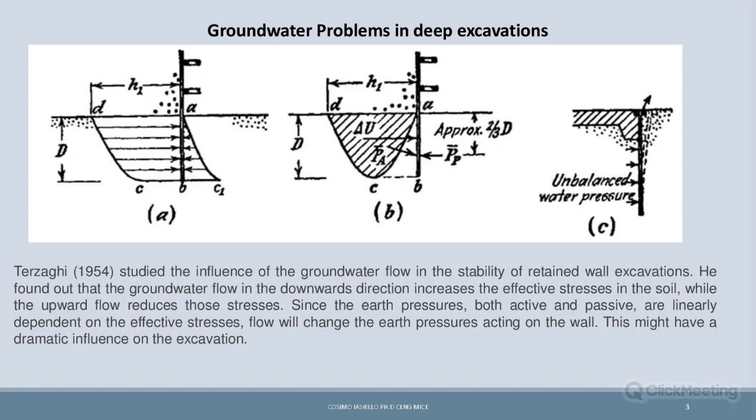Starting with some construction advice: when working with, for example, an embedded wall with anchor bars, we have to provide certain details in order not to have this problem. I can show you here.

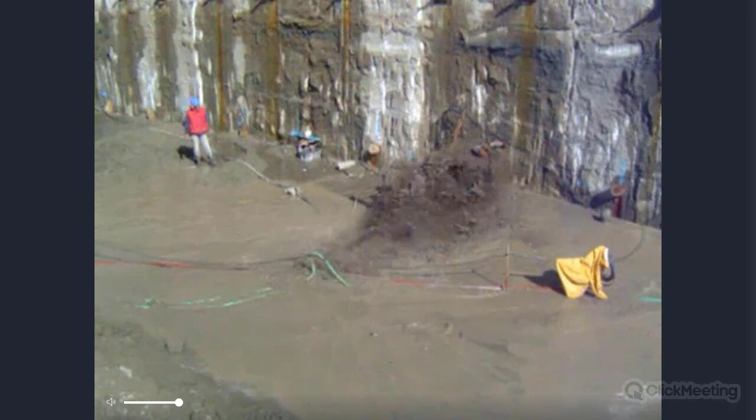This is the problem you can face when excavating in water. As you can see here, this is the water, the anchor, the original forepoling, and right now we are excavating below the water table. Here we are taking time to inject the ground, since water has the possibility of coming through this green pipe.

Once we have this green pipe, we can inject grout into the ground and stop the water from coming through. So coming back to the presentation, this is the typical anchor with the possibility of grouting, and here we have a hole, and through this hole we could stop the water coming in.

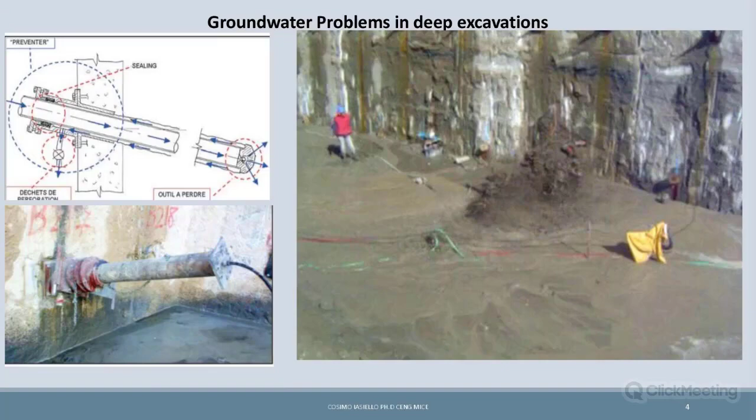Another problem in the excavation of, for example, an embedded wall is the so-called subpressure—meaning the pressure acting on the base slab. This is a case of a tank close to a river.

Based on my experience, we have three possibilities regarding subpressure: live with the subpressure, carry out permanent dewatering, or carry out some sort of soil treatment.

For example, in this case it was carried out with columns of jet grouting. We can also use the jet grouting as additional weight to calculate our uplift or heave, depending on whether we are in clay or in sand, to contrast the acting force of the water.

Also, some standards—particularly the Italian, but also the Spanish—have references regarding considering the jet grouting with some defects. So the area of the jet grouting should not be considered fully as is, but should be considered a bit less. This can also be done in our numerical analysis.

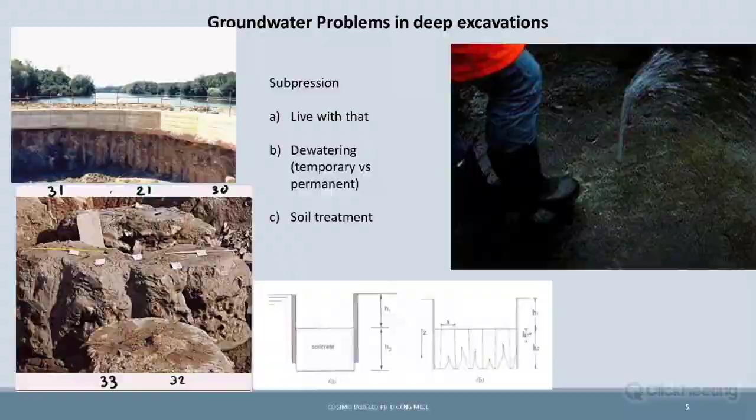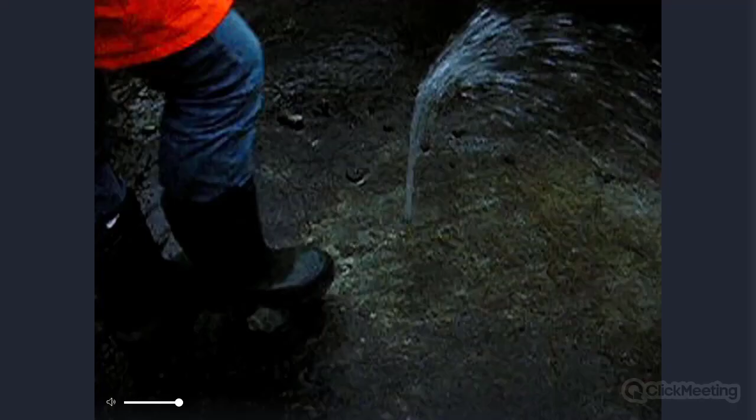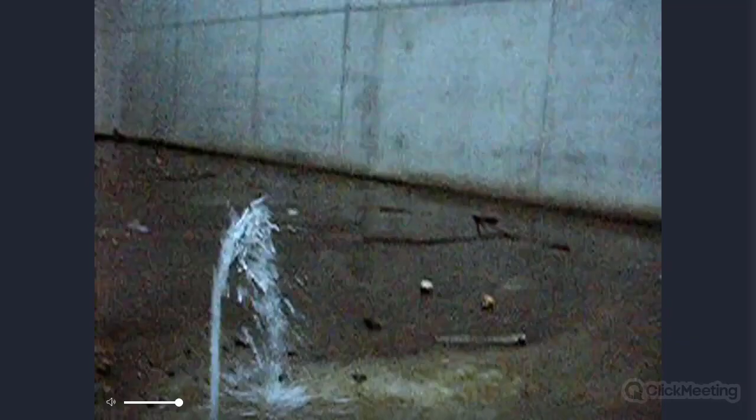This is a video regarding subpressure. Here some columns were done, here is the base slab, then the base slab was perforated to check the flow under it, and you can see how the water was released.

We could say that the deformation after or during the dewatering. This it is particularly interesting to have this number, because this would be our control with the numerical analysis.

Okay, this is a small summary. The important thing is what I told you about the earth pressure at the back of the wall, and it will rise while the pressure in front will decrease. This is important. This is a case I have studied, an analysis of a historic case of retaining structure under the groundwater table.

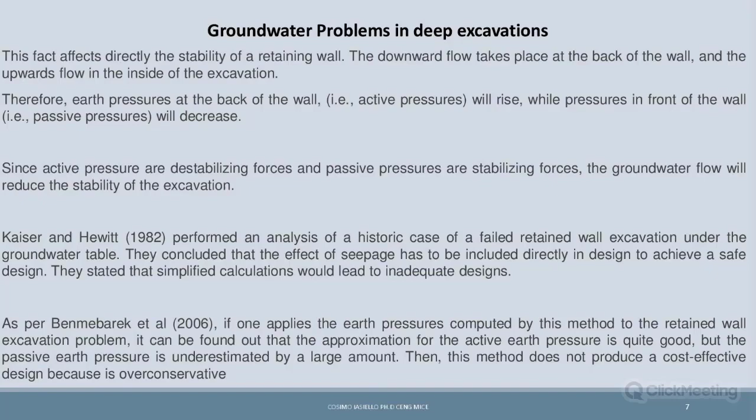This means that the effect of seepage has to be included directly in the design to achieve a safe design. And they stated that a simplified calculation would not lead to an adequate design. What does it mean? It doesn't mean that if we go back here, if we want to solve this problem only by relating it with a weight problem.

I mean the weight of this slab against some pressure of the water, it doesn't take into account the real behavior of the soil, and it can lead to a low cost effective design. In other words, our design is much over conservative. And this is also particularly attractive in those cases where the base slab or the thickness of the base slab is quite big. So this is exactly what I was telling.

Regarding the groundwater, we have three possible conditions. One is to neglect the effect of the water table. We will not consider the effect of the water table. We know that there is a water table, but we will control it, or maybe the water table is not able to create any problems for our structure.

Considering the effect of the water table only during construction, because we have some sort of dewatering, and then maybe for a temporary structure it's coupled with the dewatering. So for permanent structures, we will not use it, or we will consider permanent water table during construction and also long term. So this also can be considered in our design.

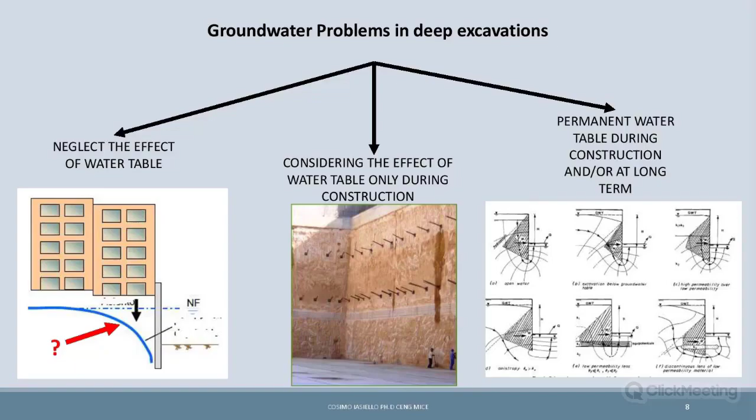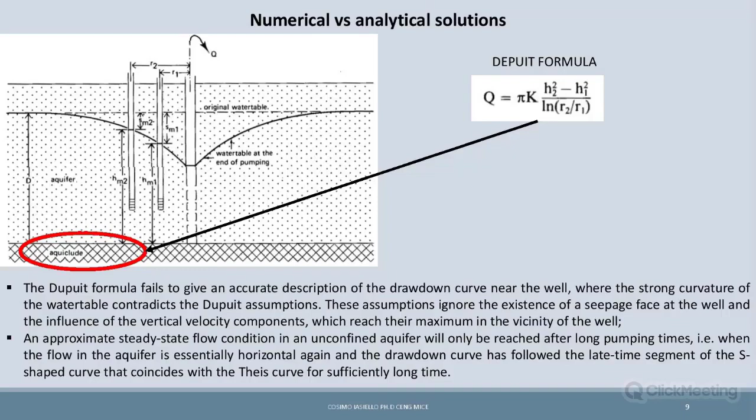So the flow is basically horizontal. We do not have any vertical flow. So if we are working, for example, to study the dewatering with a flow, with a pumping, the Dupuit formula should not be used. This curve should be used instead, because it doesn't take into account this.

Another option of analytical solution are the so-called flow nets. This particularly is what I like, because they are very graphic, and they are based on the hydraulic gradient. So the main purpose of the flow net is to estimate the flow and to check if the embedded length of our pile is enough to cut the flow net, or to avoid a value of overflow.

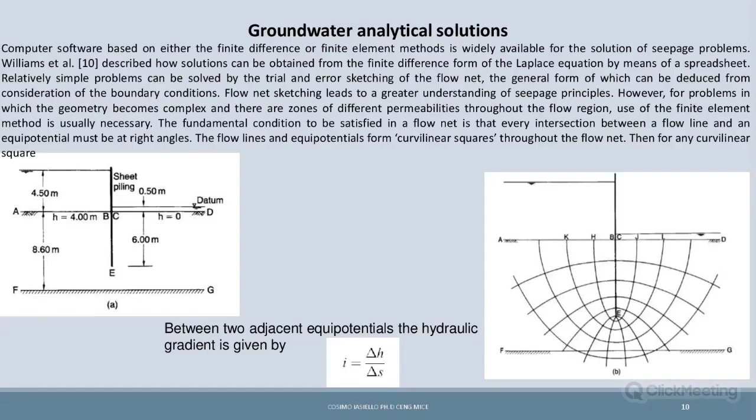And to calculate the flow net, we jump from all the equipotential lines of the curvilinear shape, to understand how many steps of hydraulic gradient I have to go through.

After that, I would say this is a high-level introduction, because at the end of the day, everyone here knows about the groundwater. Let's go with the numerical solution. Clearly, we have three possibilities of approach towards the groundwater.

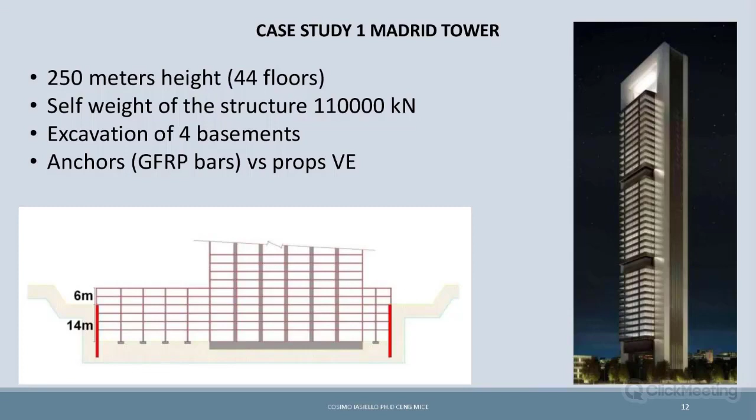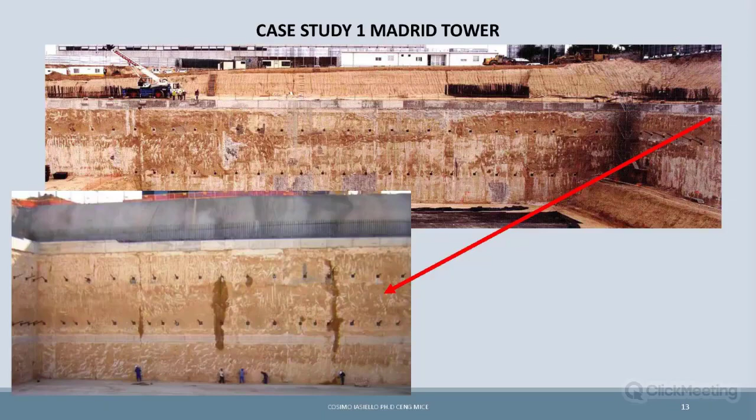So the excavation was done as previously, with temporary slopes in mid-ground. Then we have a berm to install the walls, and then the construction of the excavation. Here are some photos, and here you can see some level of water coming from some anchors - nothing important. And here is the monitoring of the stress of the anchors, because these anchors do not have the protection I showed at the beginning regarding the water table, since they considered that in this area we do not have a water table - but in this case they were monitoring the stress.

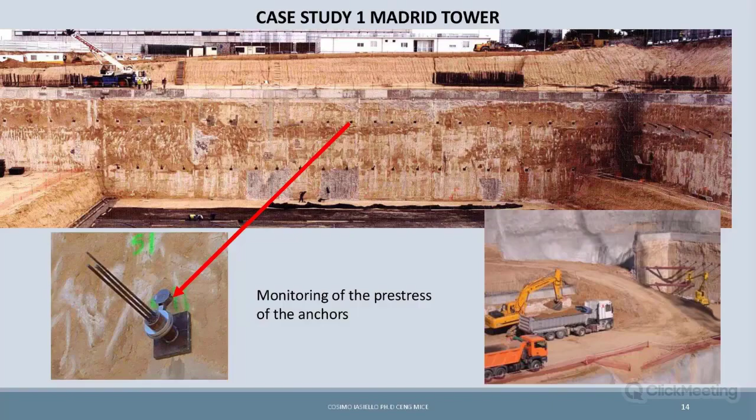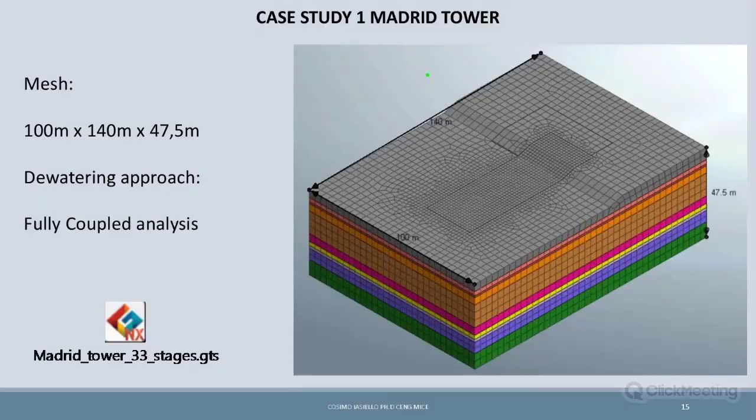What does this mean? How can we establish it in Midas? For each stage, we design an excavation, and this excavation has a nodal head. So this is doing fully coupled analysis with manual dewatering.

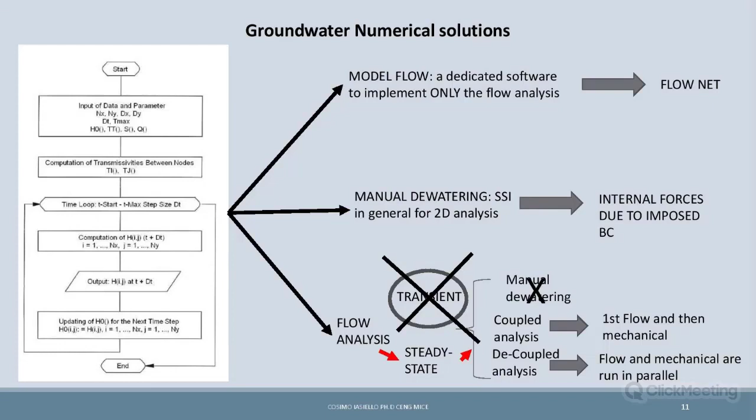This is because here the water level was not particularly important, so we decided to do a coupled analysis, but changing the manual dewatering. This also affected the duration, and as you can see, in order to speed up and facilitate possible numerical problems we could face, we set up the time. We set up the load factor with incremental values across 33 stages, just to provide the stiffness matrix bit by bit, so as not to create any problems.

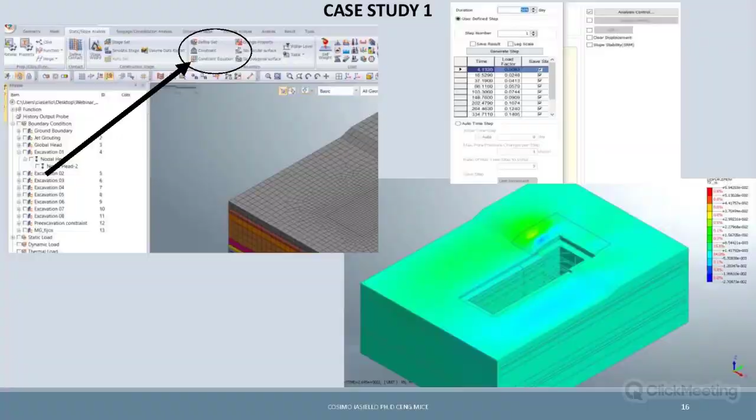And this is the solid pore pressure. As you can see here, we have a reduction of the pore pressure. Here also there were some ramps for facilitating the construction excavation. And here the equivalent flow net close to what we suppose were the drains. Okay, this was a simple way of modeling the water.

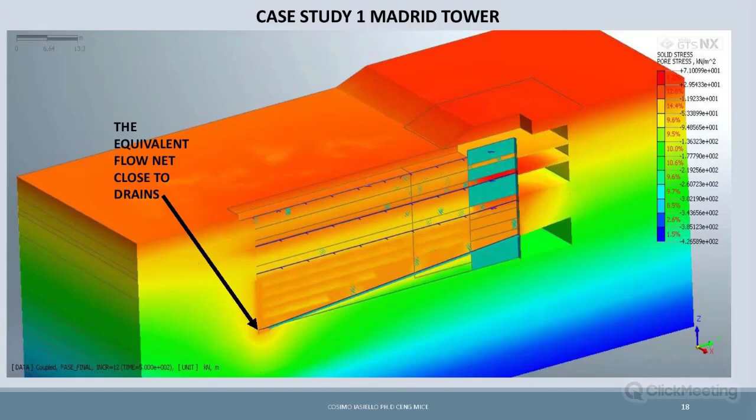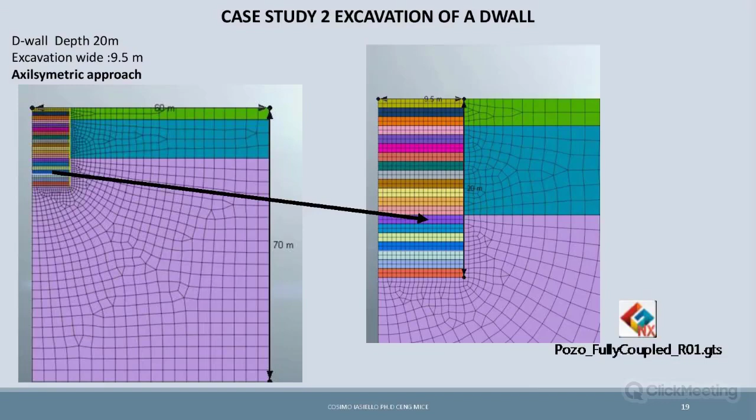Of the pore pressure. Another case is the excavation of a D-wall. This is an axisymmetric approach because it was a circular wall. It was 20 meters, and in this case we carried out two analyses.

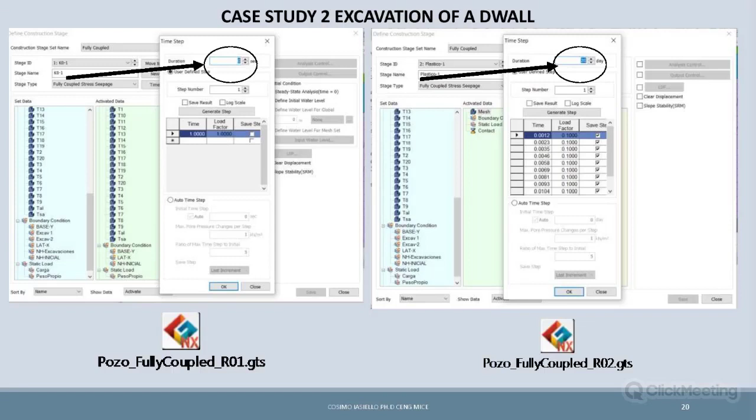One analysis, as you can see, is 0 seconds, so it's like without taking into account the time. And here is with 20 days, considering some sort of timing, just to check the differences in terms of flow.

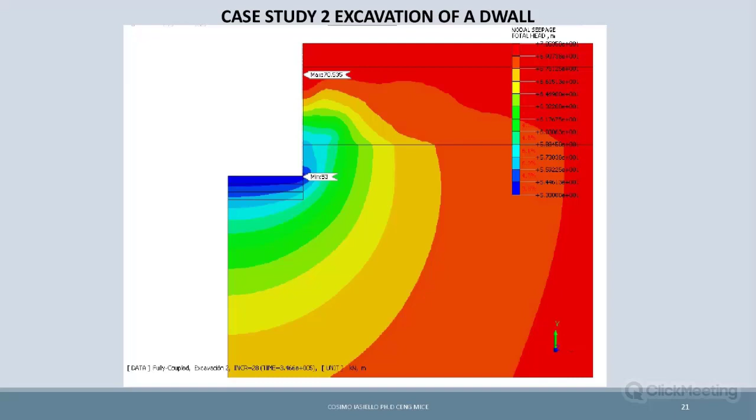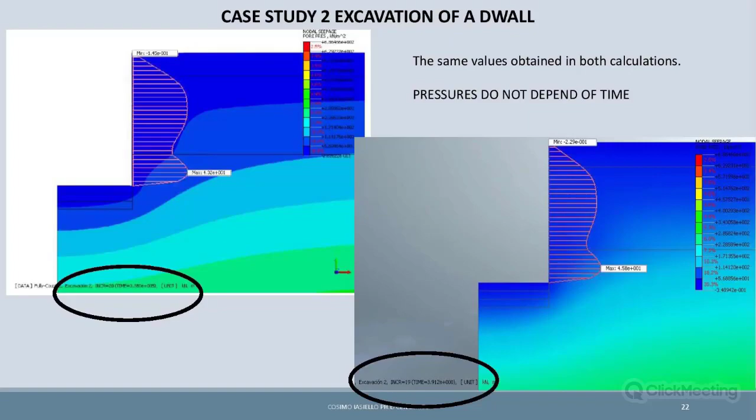The value of pressure onto the structure is the same because the pressures, and so the internal forces we are going to use to carry out our structural analysis, do not depend on the time. What is depending on the time at the end is the flow. So as you can see here in 0 we have something from minus 5, and here we have a minus 0. So we have a 5 order of magnitude difference between the two calculations.

This is helpful for us because sometimes as engineers they ask for a flow analysis, but when we have already set up the flow rate, in this case it's very easy to implement it in Midas because we can set up the day to have this flow rate, and we are sure that our pressures are not affected.

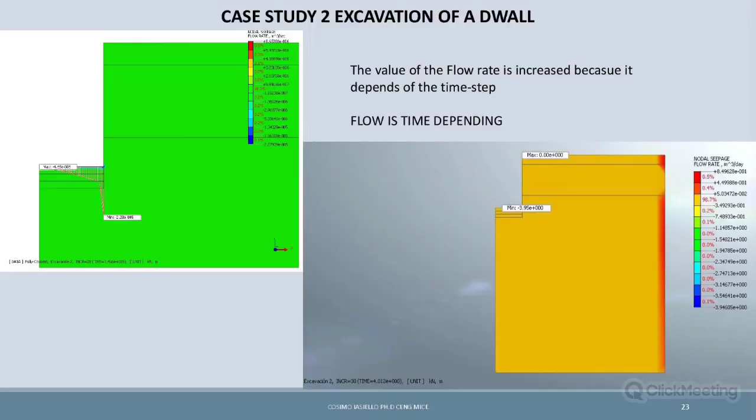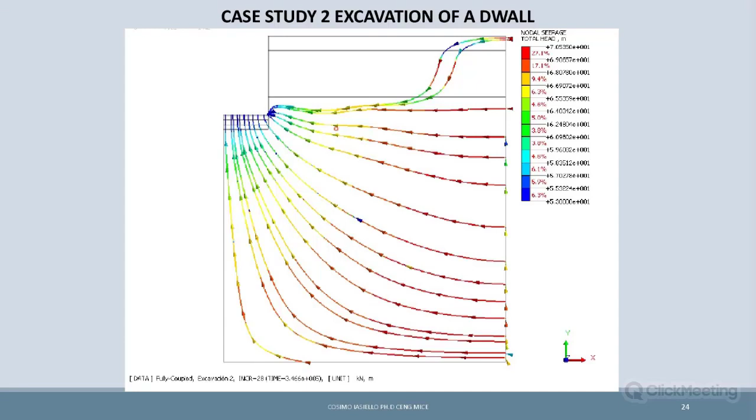This is okay, this is academic. This is the flow net at the end of the day, and how we could check it against the numerical against the analytical solution. And then we have case 3.

This is a TBM launch chamber. It's another project we are involved in, in London. Here we have a shallow water table. In London we have the level table of the Thames, a very dense urban area. Then a complicated construction process, and then the interaction between these two parameters.

So two scenarios were carried out. One scenario is the pure full, is the coupled, and the other was coupled with the dewatering. I anticipate it because it's not working, because of the difference of the potential energy we have in our excavation. We will go through this later.

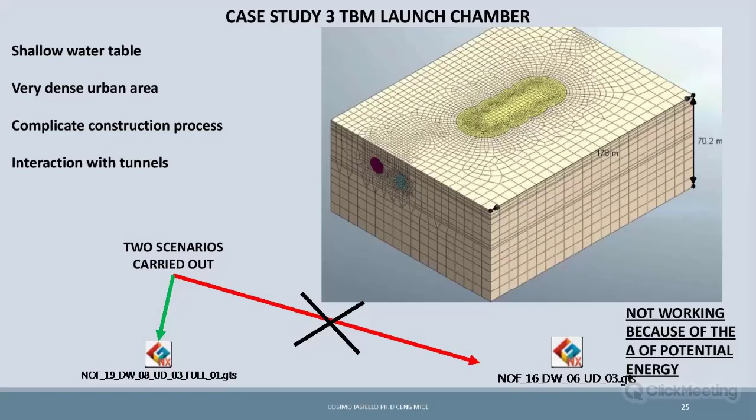Okay, so here, as you can see, the fully coupled analysis - we have all the phases in one stage set. So we are not going to define manually which type of pressure has some mesh set or some node. No, we tell Midas, this is your water table in this stage.

It is the initial balance, and then, less by less during excavation, we say okay, right now your water table will be according to some position of drains, and we are going to have in this drain a flow of pumping - so negative, of minus 1 liter per second or 2 liters per second, depending on what our hydrogeologist is telling us. And so, as you can see here, we have a perfect depressurization cone, and here also, as you can see, you have also vertical flow.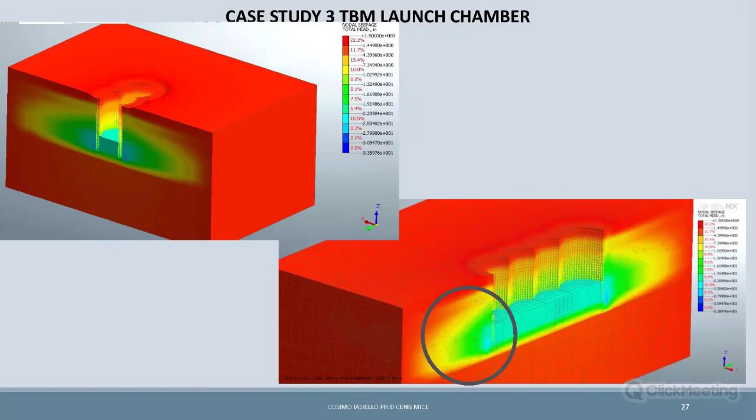You have also vertical flow because here it's considering the flow net and the pumping. And here we have - here there's some problem here. This is the problem here. So here, instead of the case with the manual calculation...

Where we are setting up manually the pore pressure, as you can see here, we have almost - in pore pressure we have 391 kPa. So we have a lot of pore pressure, okay, and this is going to create a yielding in this material, and there is a problem of convergence.

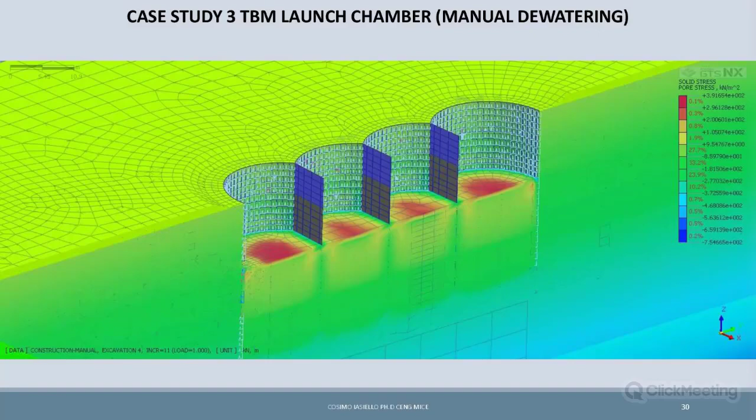Also here, as you can see, these are the differences between the two levels, taking it at the same - this is the two approaches taken at the same, at the end of the day, at the same step. Here we have the perfect shape and everything is working, and here you have these problems.

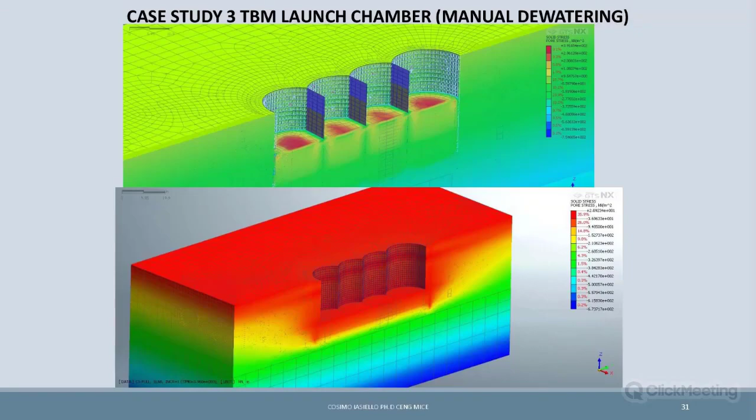I'd also like to underline here, if I plot the vertical stresses, the vertical stresses here are the same value as the pore pressure. So basically, our ground is boiling. We are going to have heave, no?

In reality, if I had to design this with manual dewatering, I'd say this cannot be done. But in reality, with a good analysis, a more refined analysis, and knowing how GTS is working, we could create a very good analysis.

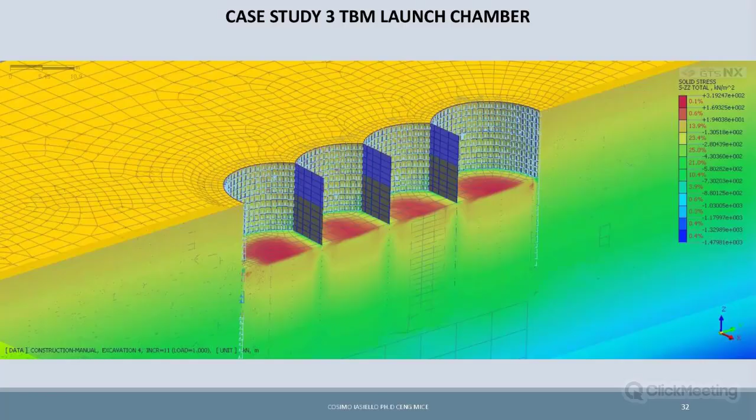Regarding case 4, this is also another elliptical shaft, and this is a shaft in soft soil. This is an interface with tunneling, and here you can see the position of our drains. We have position outside the element, and then we have position inside.

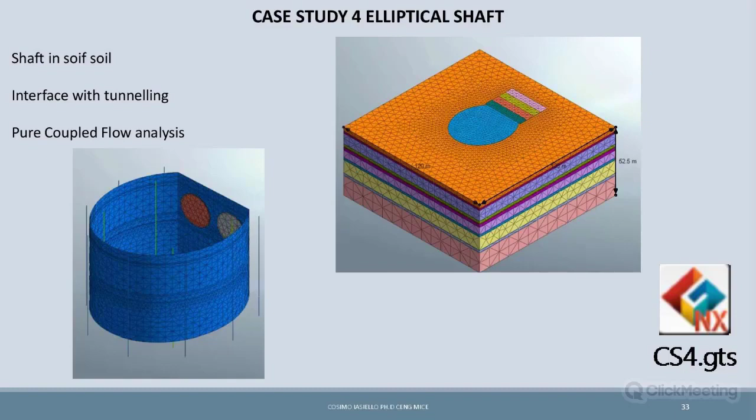Here, as you can see, we also have a pure coupled flow analysis. So we have only one tree from the stage set. So we do not have the changing manually.

As you can see here, you have two types of analysis: the steady state analysis, where you are only analyzing a flow analysis, and the analysis of stresses, where you are taking into account the steady state analysis and implementing it in our matrix.

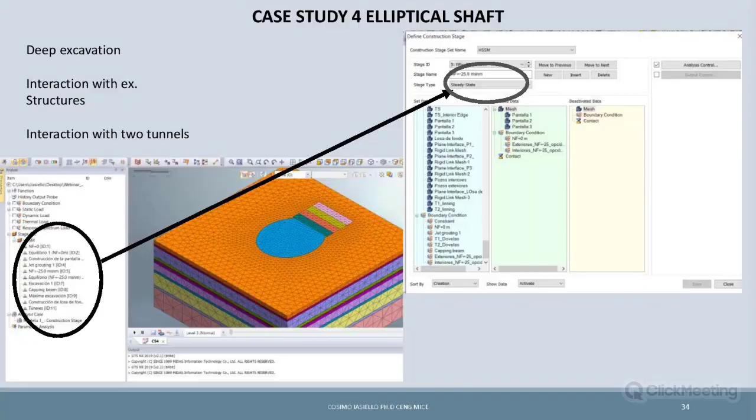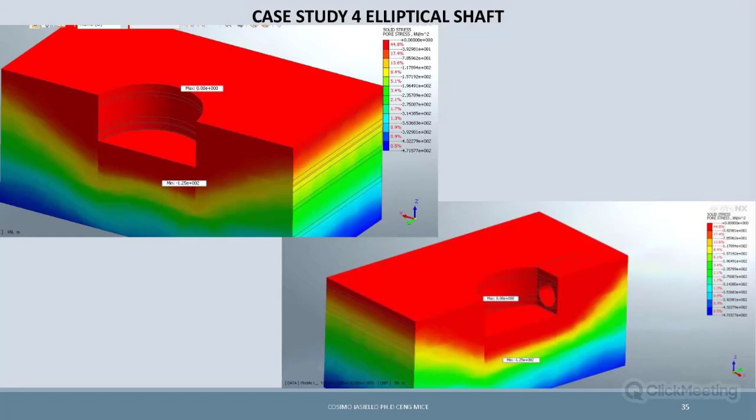The results are the same. As you can see here, you have the vertical flow, and as you can see, there is also a 3D effect, very difficult to capture with only a 2D analysis. Here also you have a tunnel, so it is important to define the dewatering in this area.

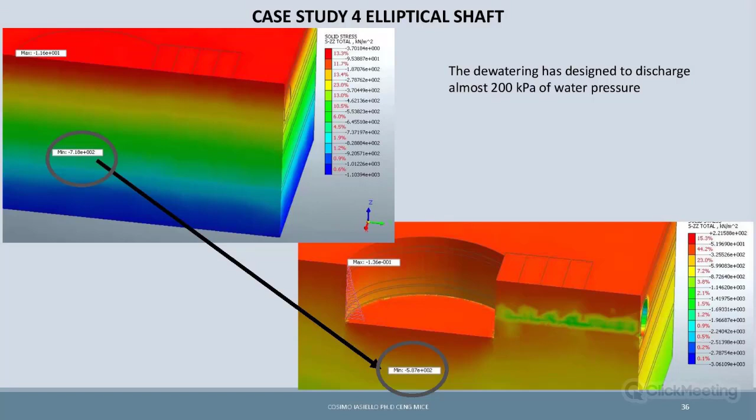This is in order to escalate without taking into account the sub-pressure of the water onto our slab. These are also the definition of the displacement. As you can see, the displacement is really small, but it's important to manage the displacement.

I don't know if you remember at the beginning when I told you about this displacement - this is one of the controls we have to carry out after our flow analysis, because maybe the model can work, but our displacements are high, which can invalidate conditions we could have around here.

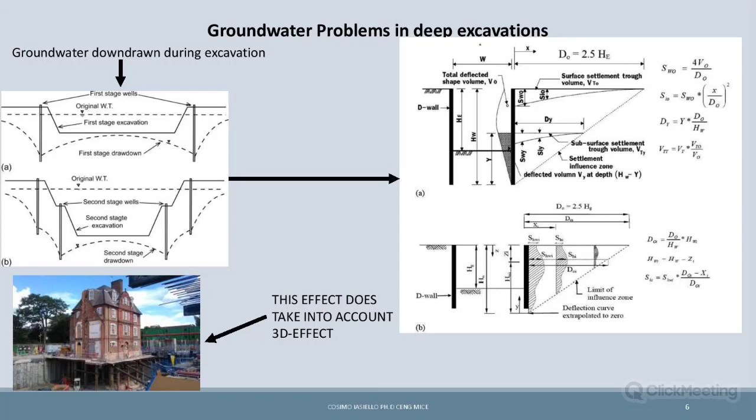In this case, we are working in almost free field conditions, apart from some utilities, so we do not have much of a major problem.

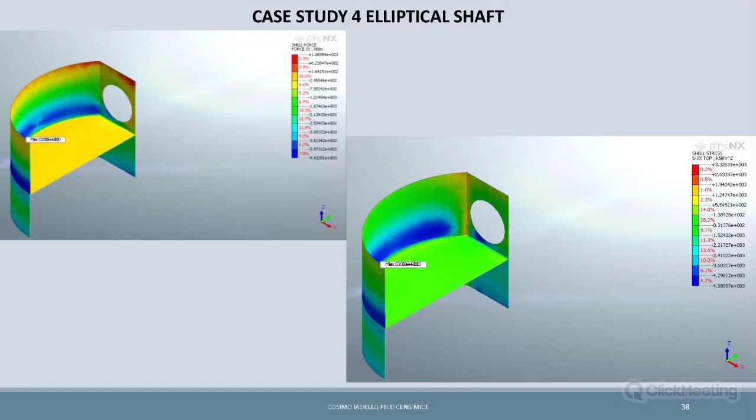Then you have the average, and depending on our calculation, we could choose one of the others.

So the conclusions, from what I showed you - and if you want, we can go through the models - the water table, if present, can be neglected in some cases where the engineer estimates that it does not affect the excavation and/or the structural elements. This can be done in some cases.

For example, in case 1 I showed you, we carried out a flow coupled analysis because we thought, based on the information we received, that there was a water table, but then the water table did not appear, or appeared only in very local cases.

So it was not a major problem. If the water table is variable during the excavation, but drainage will be conducted onto the structure, it is possible to estimate it with analytical calculation or by drawing a flow net.

This is something that actually should be done all the time. I mean, before going through the analysis, we should have a rough number, or more or less an idea, of what our target level of water should be during each phase of excavation.

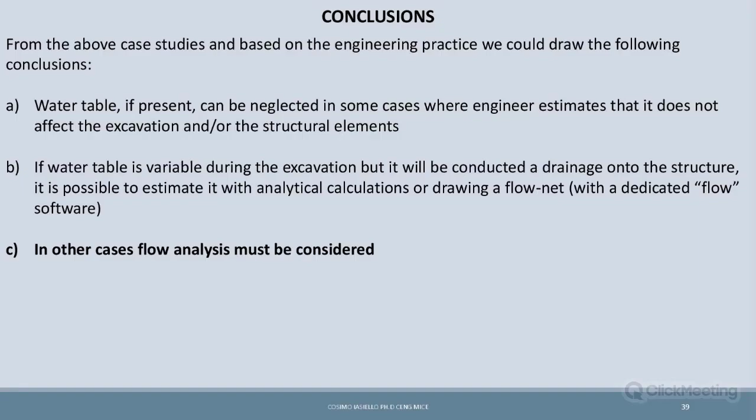In other cases, flow analysis must be considered. So now, how Midas GTS prescribes 3 main ways of simulating the water table.

The manual imposition of the water table. This model can be employed with old models, Mohr-Coulomb, in soil. It is very quick, but it's not employable in the dewatering process.

Because if we are changing manually something that has to be done over time, we risk having numerical problems, since we are telling the soil to pass from saturated to drained conditions in one instant. This can create instability, not only numerical but also physically unreal. So our model would not be realistic.

And then there is the decoupled analysis. In this case, flow and mechanical are solved in parallel, and it's quite good for very over-consolidated clay, for example in some cases with London clay.

And then the coupled analysis, in this case flow before the mechanical. This is the typical approach, this is the most important one. What I would like to underline is that these three ways of simulating the water table can be used in different options.

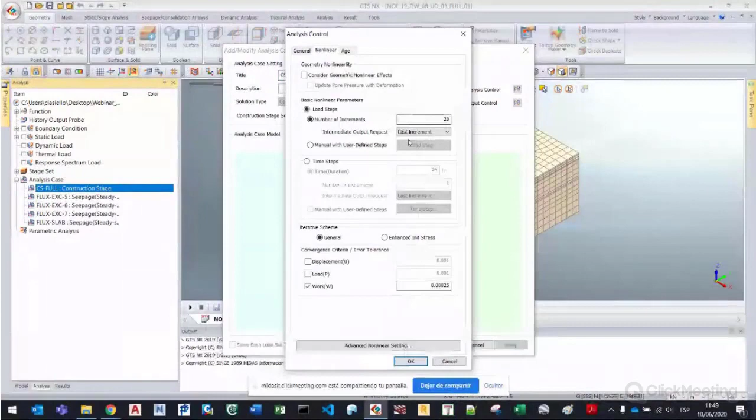Okay, so for example, here is the model we are mentioning. If you come here in analysis, you have for example here in analysis control. You have here to work out the small strain. Also, you can do it in your definition of the material.

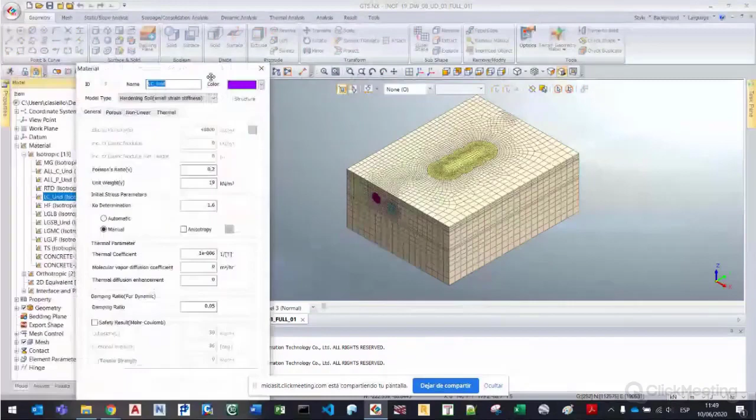You come here, and in nonlinear settings, here you have the small strain parameters, which I do not use in this case, because here it's undrained behavior, so we are considering it without small strain. In this case, we do not have any issue.

Actually, Midas allows you to define, compared to other programs like Plaxis, the poor hardening soil, in which the small strain also depends on the dilatancy angle. So in this case it's much better, I would say. There's something I'd like to mention, the behavior of the permeability coefficient, the specific storativity.

I suggest you also use the auto formulation. The formulation of storativity is in the manual, in the flow analysis section, and should not be calculated by hand, because if you calculate it by hand you can have a problem. Based on my experience, it cost me some time to figure out why a model did not reach convergence. It was these parameters.

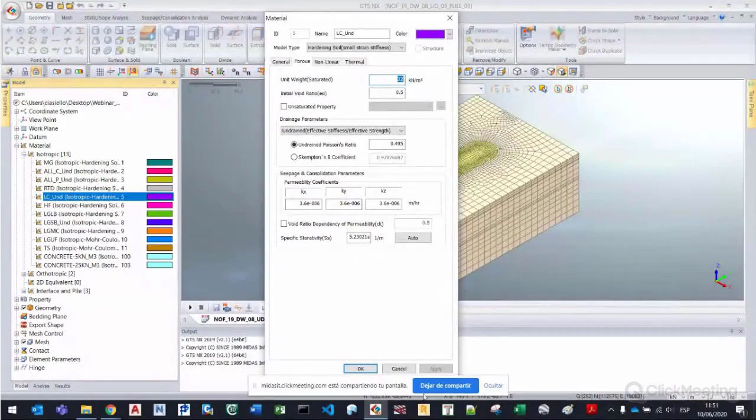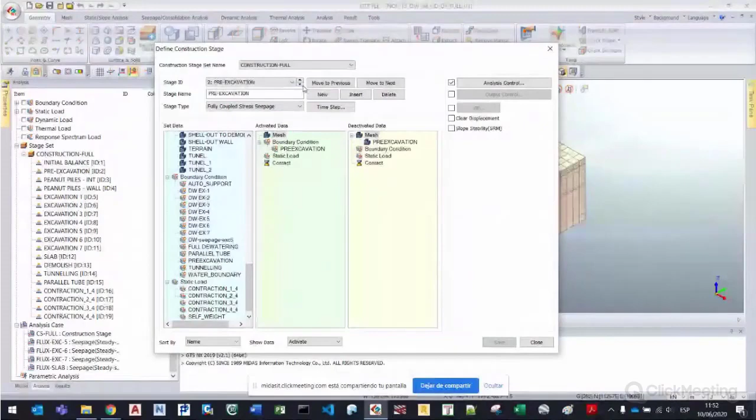Okay, what I was telling you is this, this is exactly how the flow is. So as you can see here, you have the excavation, completely steady state, but you have only one construction stage set. So for example, here you have a steady state, you see fully coupled stress seepage. So here we are calculating everything, and then you have only fully coupled, and the flow is calculated here.

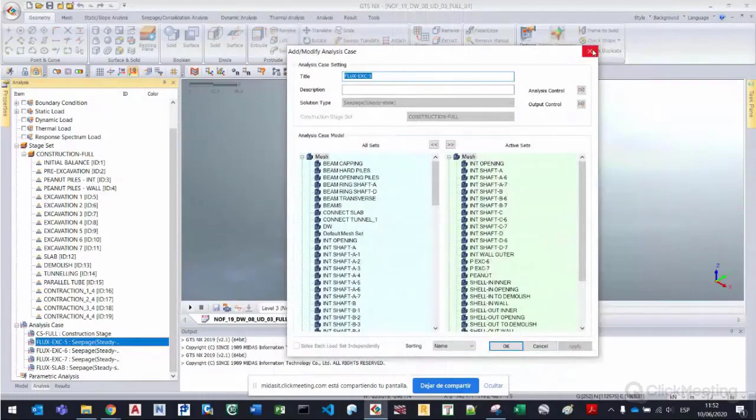So each time excavation 5 is directly recognized, excavation 5 and excavation 5 can be the same because I've defined it. As you can see here, I've defined them with the same active mesh set. Okay, so this is easier to do something like that, and we don't have to manually change the level in Midas. This can be automatically done, but to check where we made some mistake is very difficult.

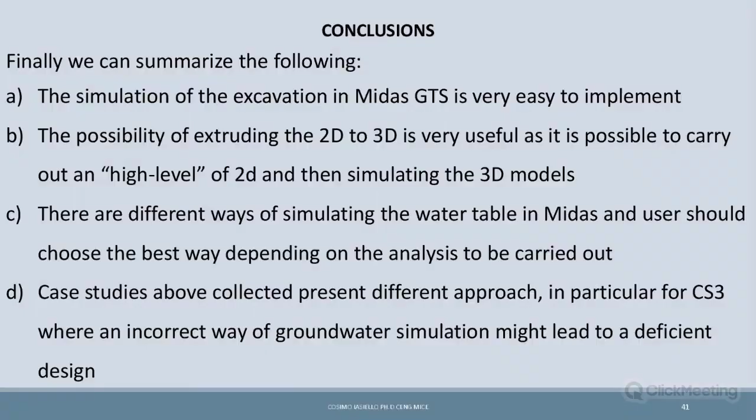Okay, so this is more or less what I would like to tell you. I don't know, Damian, if I answered your question or if something is not clear.